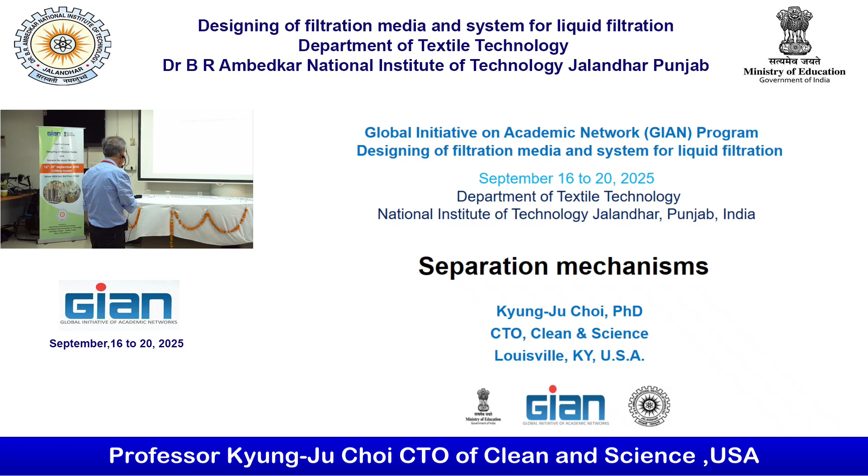Professor Mugwadi actually covered a lot of material too. That was really good. I really appreciate it, because I can shorten down my presentation a lot, because this is all separation and nothing to do with filtration.

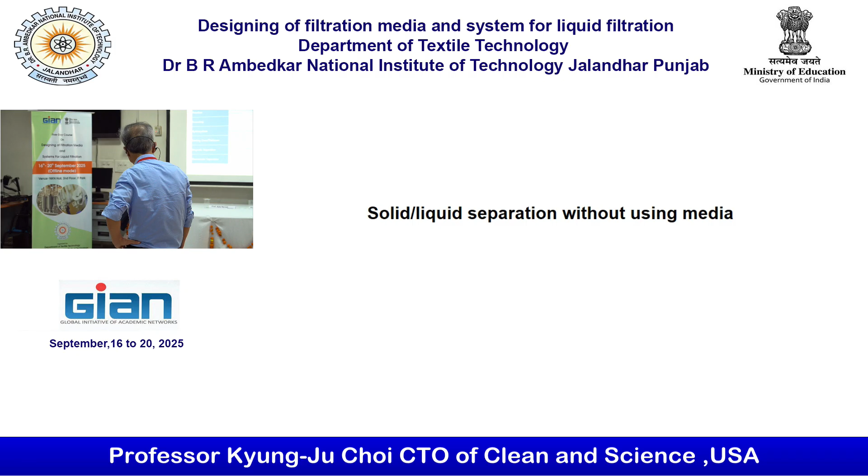This is the busy slide, one of them. Solid-liquid separation mechanisms: sedimentation, we already talked about it, and centrifugation, flotation. Oops. Decanting is quite an important one. The hydrocyclone, settling, thickener, magnetic separation, and electrostatic separation.

So sedimentation, everybody probably already knows: gravity-based settling, clarifier. So the advantage is cost, it's low cost. However, it's a little bit slow. And sludge dewatering. I believe you're going to have a copy of this one. So I'm not going to go into detail, but decanting and hydrocyclone. Magnetic separation, I have some examples of magnetic separation. You look at it. The electrostatic, that's currently quite a popular area.

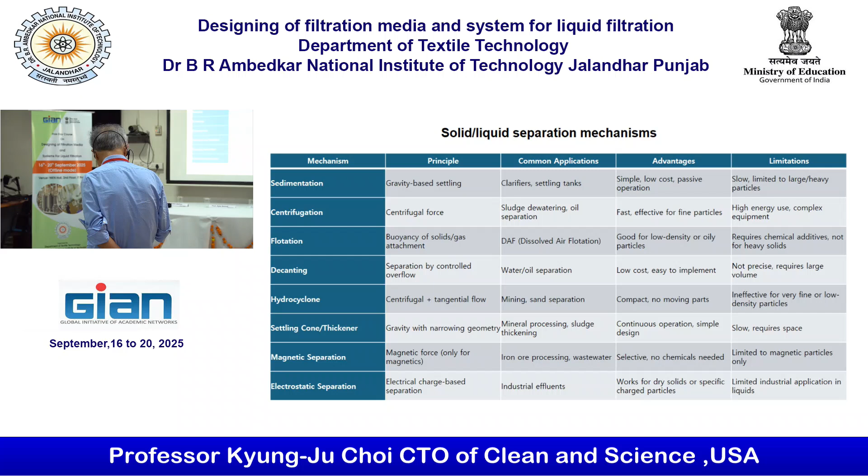Can you raise the volume? I think it's maximum. Did you know? Probably you don't know. I'm actually a singer. I like to sing. I'm actually a tenor. Huh? When are we going to listen to your song? Last day. At the party. But you have to do really good at the exam too. There is an exam on the last day.

So the exam is quite important, but as long as you listen to the lecture, then it's not that bad.

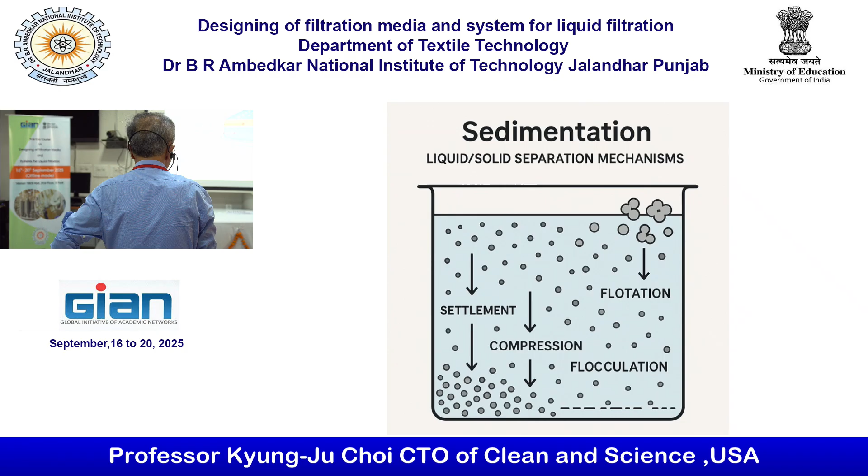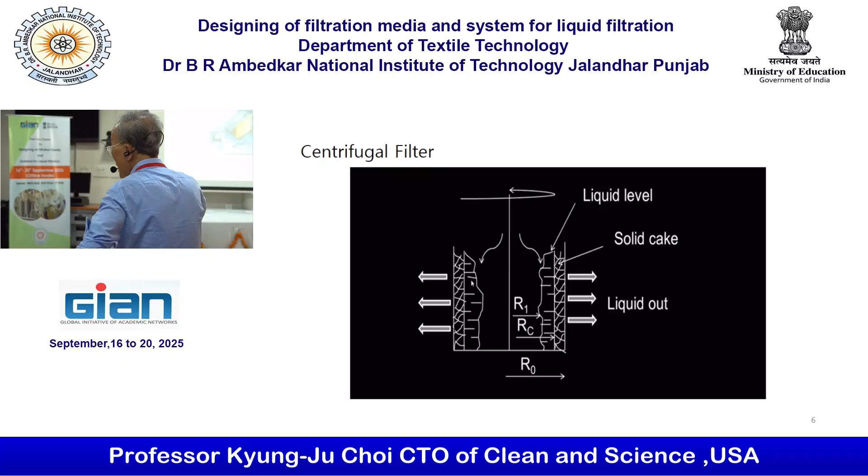Sedimentation, flotation. I have a course on flocculation and agglomeration level. Also this part, Professor Mugwadi covered some of them. Yeah, centrifugation. This is a really important subject. This one you will probably see when you visit the dairy company. They use it a lot. So I'll give you one example of it.

I love to drink milk, but not whole milk. My favorite is 1%, because 1% has a little bit of cholesterol, but not a lot. So that's why I like 1%. That's my favorite. Also, you can make yogurt out of 4%, but skim is not easy to make. So I'm a chemist. Also, I have some other minor major; it's more or less the biological area.

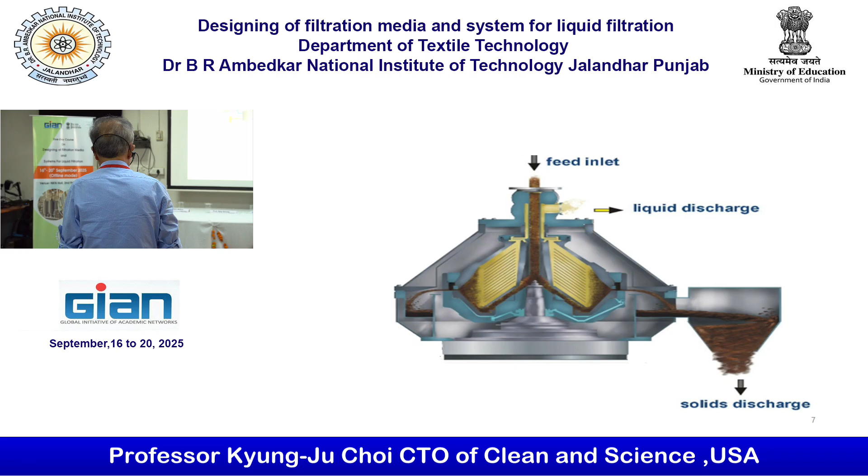So this one, there are several reservoirs, so you can take 1% or 4% during the centrifugation. You will see this equipment a lot when you visit the dairy company. This one, I don't know whether you already knew about this process. Anyone know about this? Flotation. This is a really important part of the separation process. Currently a lot of companies are using this technology.

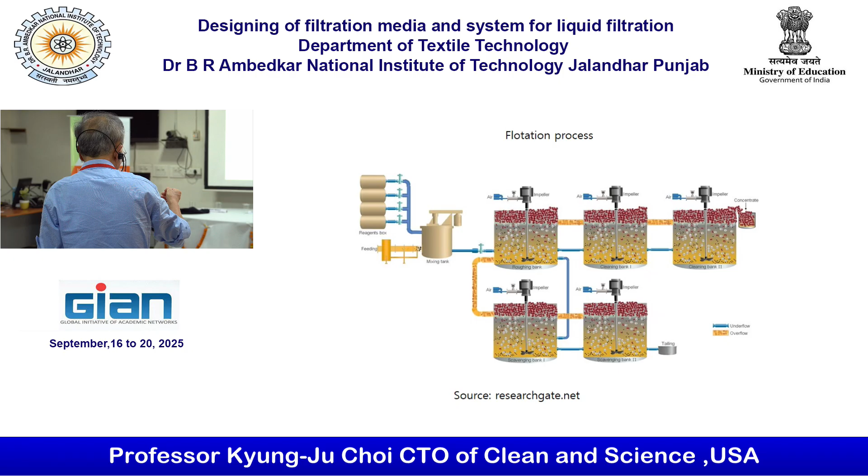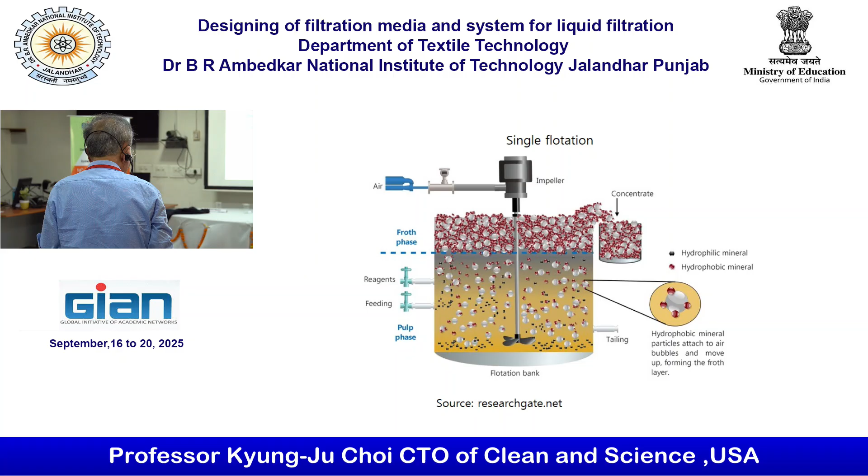Then this is the bubble. We create the bubble if you spin it. Then the bubble catches only the hydrophobic mineral and then floats. That's why you can separate it out. This is quite an interesting one. This technology is not that old. You know, froth flotation process. Froth is the mass of bubbles.

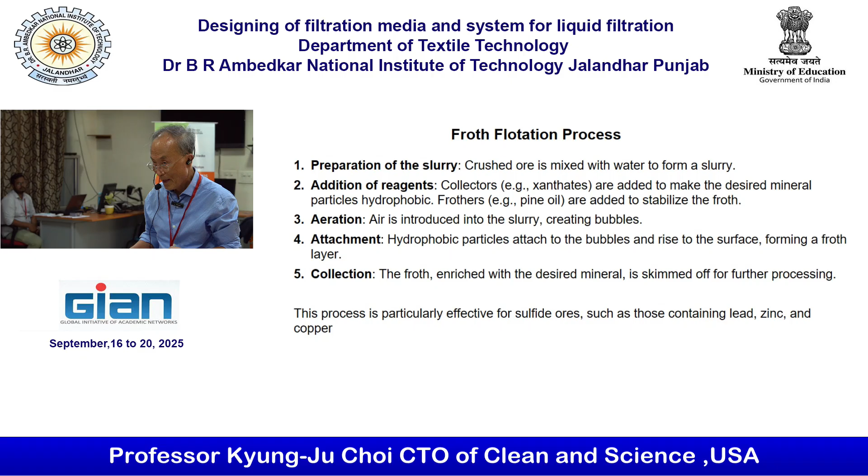Here you crush ores and mix them with water to form a slurry. Addition of reagent. I don't know whether you heard of xanthate. Have you heard of it? It's a sodium salt. So you have to add the xanthate and frother, which is pine oil. It depends what type of material you want to eliminate. So aeration is quite important.

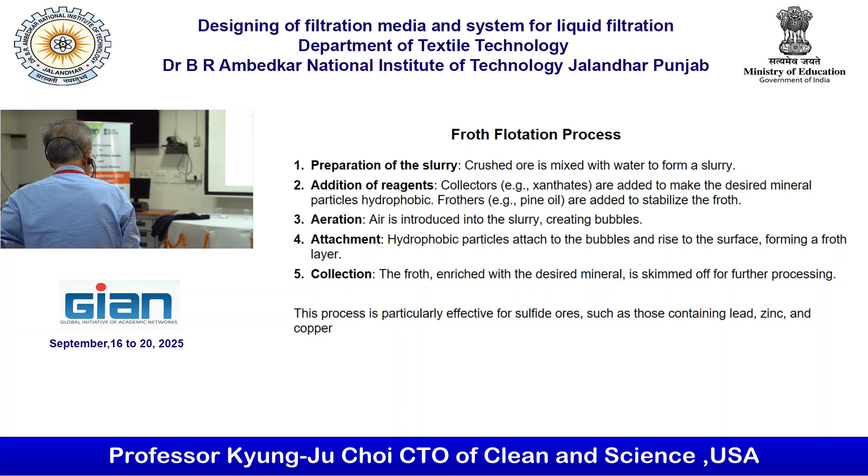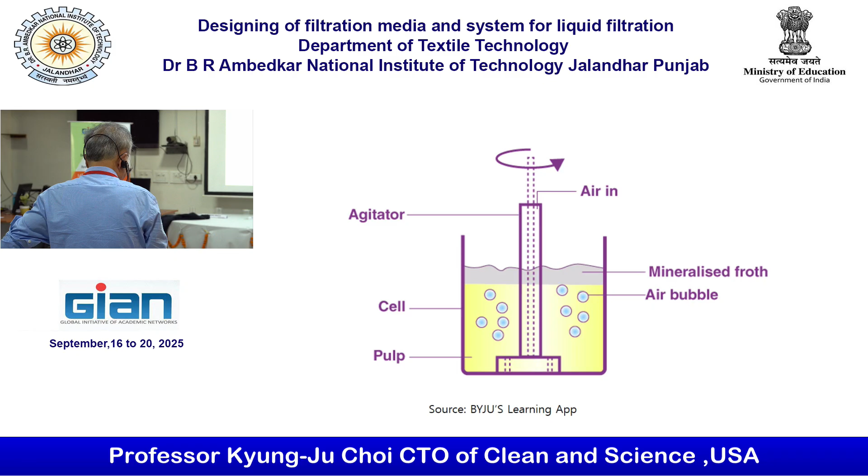So the froth flotation process came out not really a long time ago, maybe about 10 years or something, but it has been quite popular at this time. It's more like a schematic of the material that we cover, making froth. Sometimes you use compressed air to make a bubble.

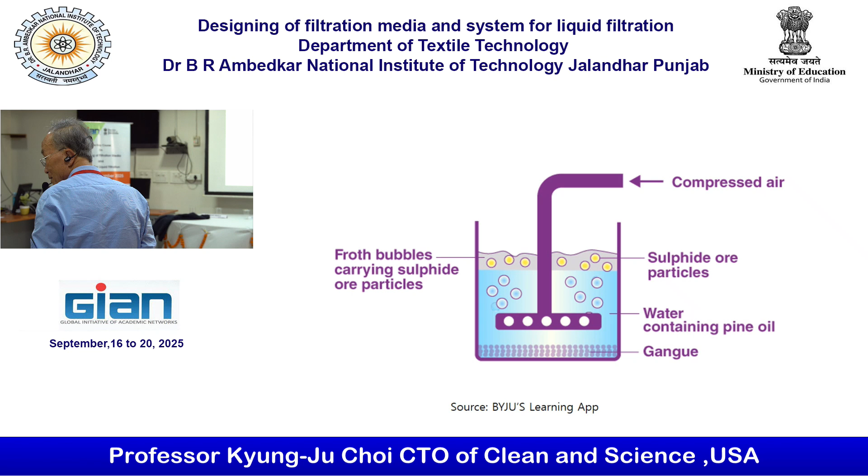Advantage: almost all types of mineral can be separated by this process. Surface property can be controlled with flotation reagents. See, I gave you one, the xanthate, and that is only one example. There are a bunch of others too. And the disadvantage is it's quite expensive, because the material we use has to be compatible with the material you're going to filter out.

The last one is quite an important one too. It's dependent on the operator. So the operator is quite important, especially in liquid filtration. If the operator knows the principle of it, then probably the efficiency is rather high, but if the principle is not that strong, then it's trouble. That's why you are here, to learn the principle.

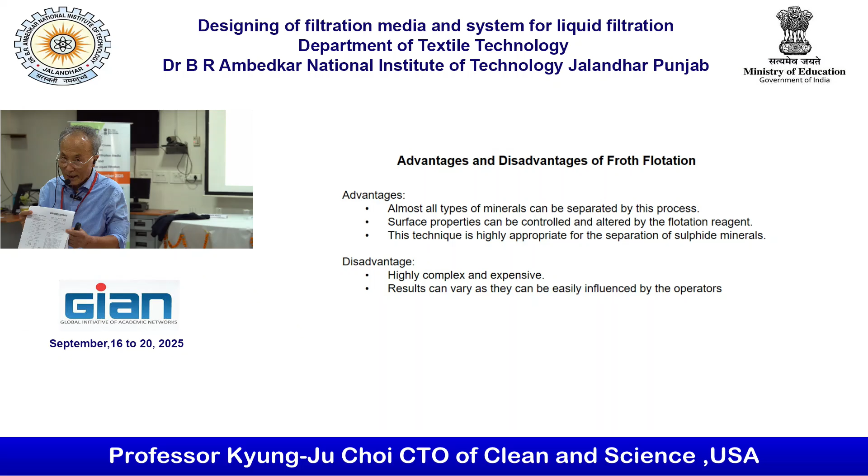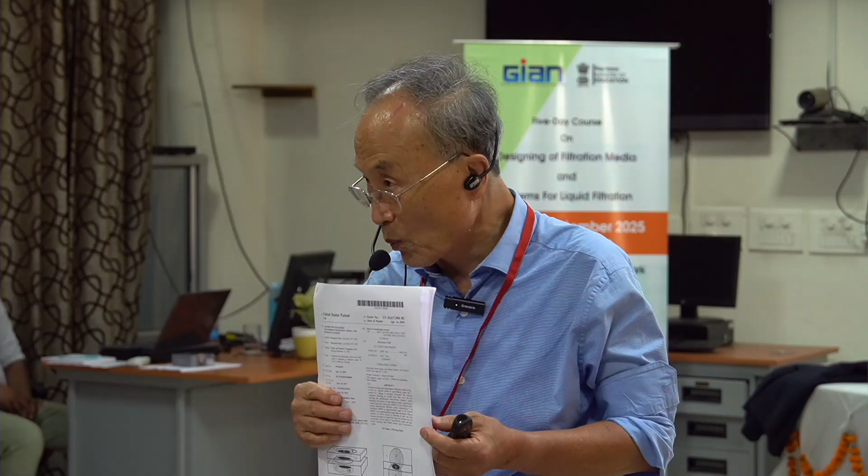And then you're going to have my patent, this one. I believe you have the soft copy. Yes. This is the media design, how you're going to design the multi-layer media. The principle is there. The example is there too. So this is quite an important paper. I'm not going to go over the detail now. I'm going to go over it a little bit later on.

You know, when I teach, what I like to teach is the course you never heard of. See, the course was established a long time ago, but there was no instructor to teach that course. For instance, flow through porous media. The course is in chemical engineering. Any school, they have flow through porous media there. But when I look at the history, no one wants to teach that. And so I just volunteered to teach it.

So you have to know the mass transfer phenomena. Otherwise, you may not be able to understand the principle of it. The other thing, basics are so important. However, if you know only a little bit, then you cannot apply it. If you like to apply basic principles, I'm going to give you some examples later on. The basic fluid mechanics, the issue, if you like to apply those principles, then you have to understand the basics.

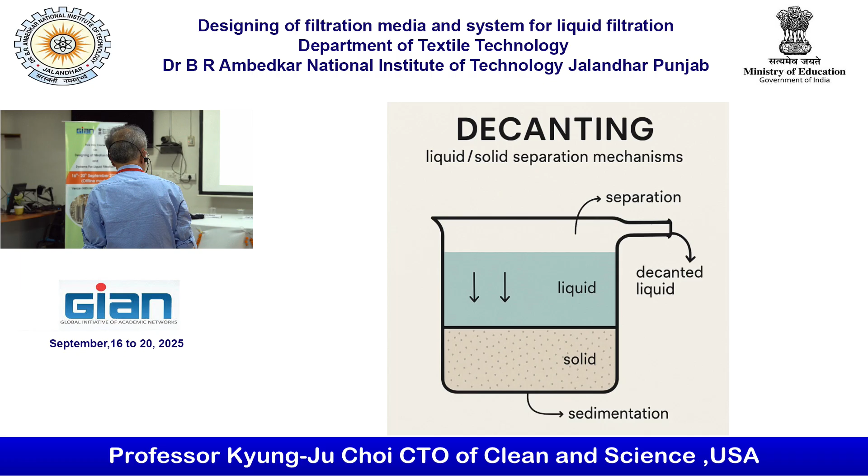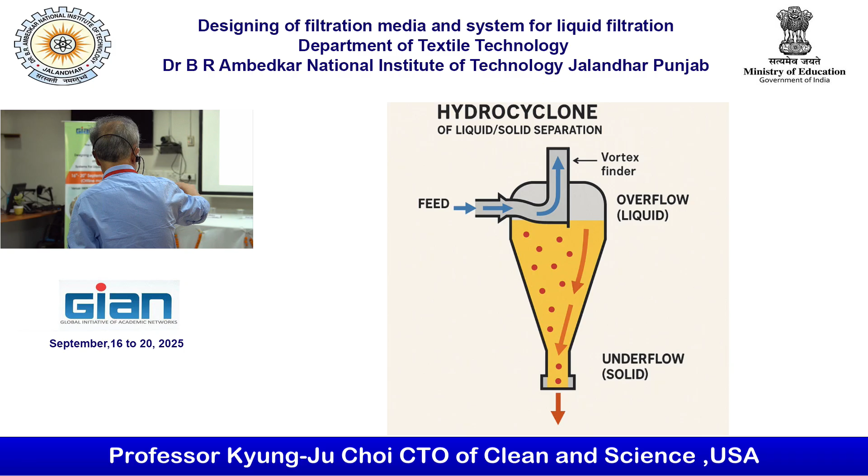Decanting, I believe you already know about this one. Hydrocyclone. This one looks two-dimensional, but actually it is rotating. Here, this is the schematic. Solid comes out, and liquid goes over with the vortex. This is one type of sedimentation. We actually use this one in waste treatment and water treatment. So they have some combination of hydrocyclone along with sedimentation.

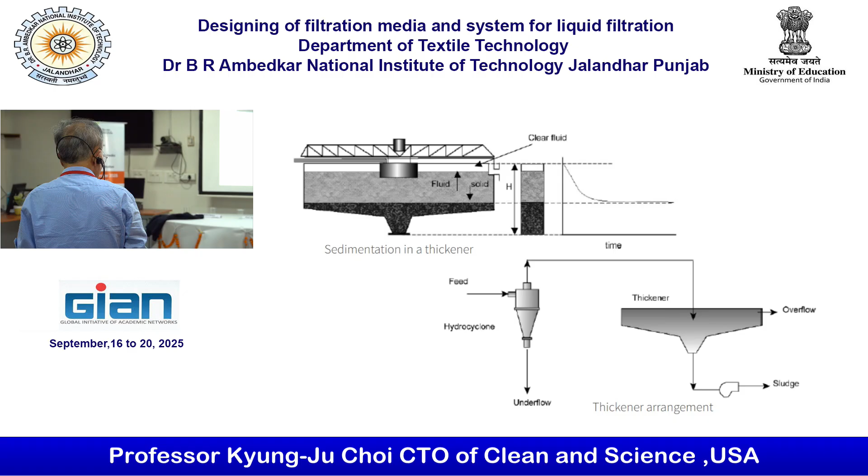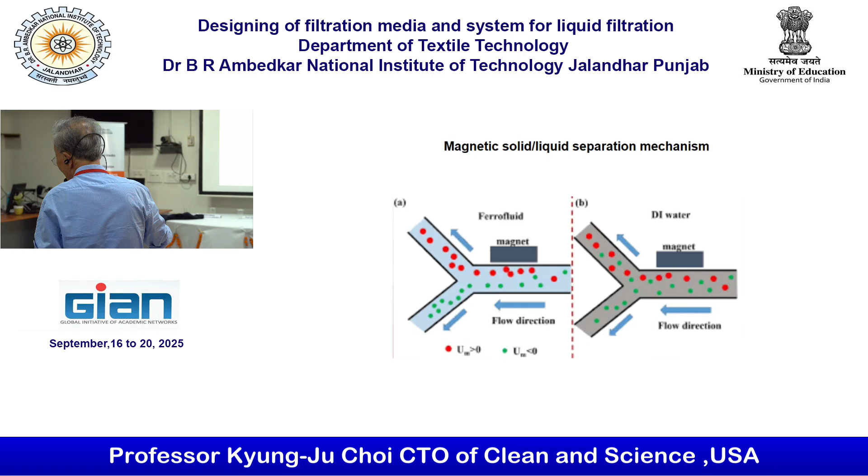Magnetic separation. Well, actually he covered some of them. Magnetic separation. The mining industry uses it a lot. High gradient magnetic separation. For example, kaolin clay purification to remove iron oxide, magnetic separation is good. Wet drum magnetic separation. He showed you the dust removal kind of video, but this one is a little bit different. They use magnetic separation, but the principles stay the same.

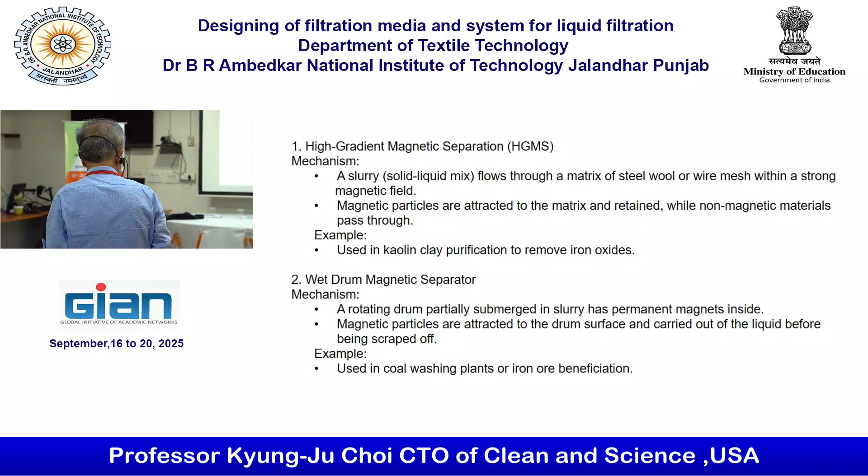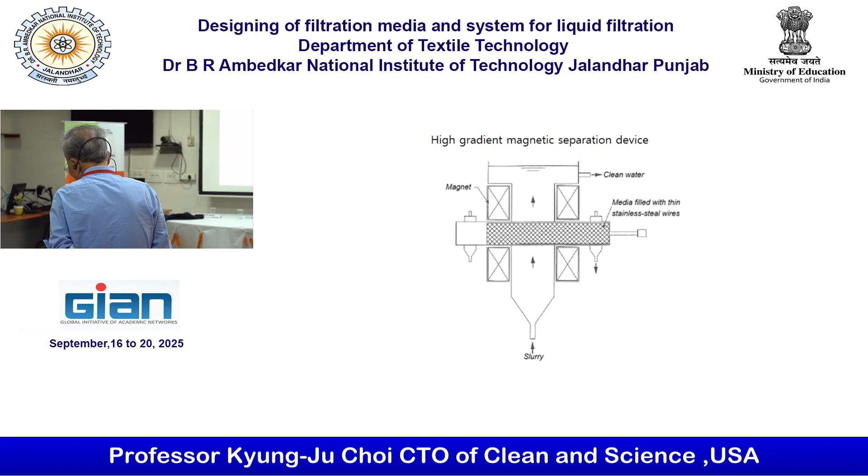Oh my dear. No, that's it. Okay, good. Thank you.

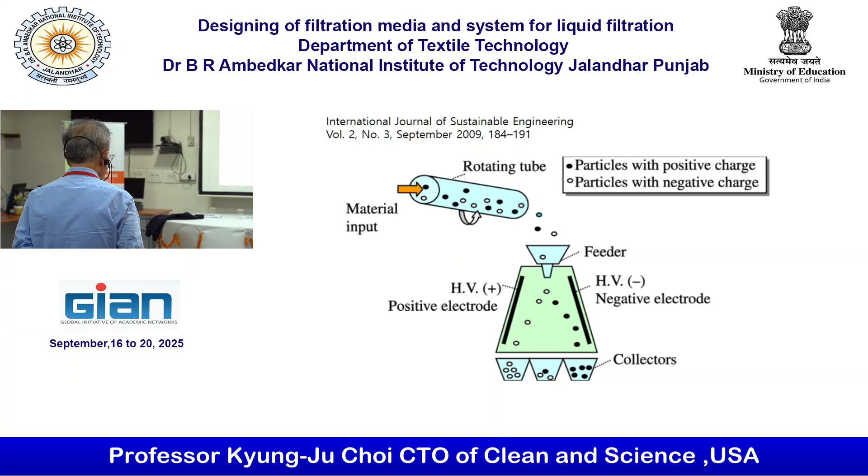Yeah, positive electrode, negative electrode. So somehow you can separate out using that. This is not magnetic. Rotating tube. It's electrode separation, not magnetic, I think. Yeah, that's electrostatic separation. So this one uses a static electrode. Normally, if you apply electricity, they use high voltage. So you can separate any type of solid material like that. It's more like classification. I'm not sure whether this one is commercially available or not. It's 2009.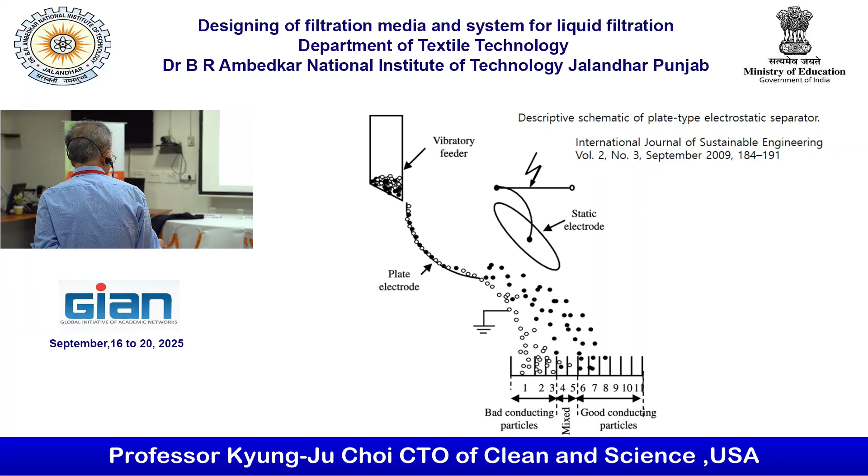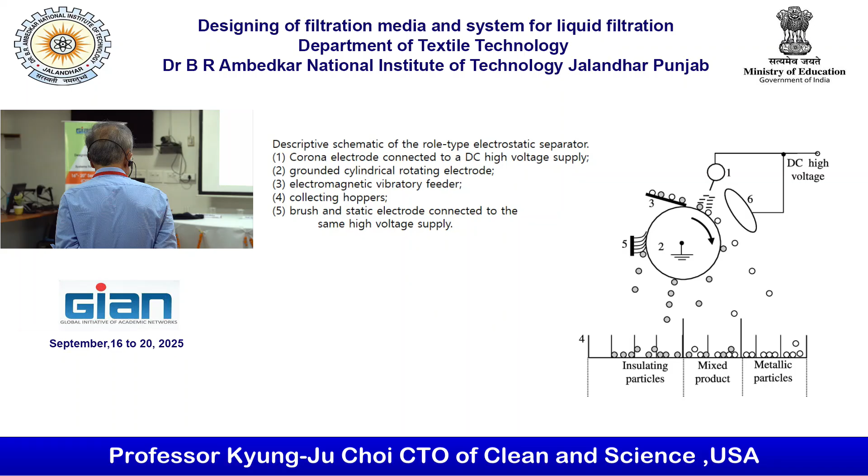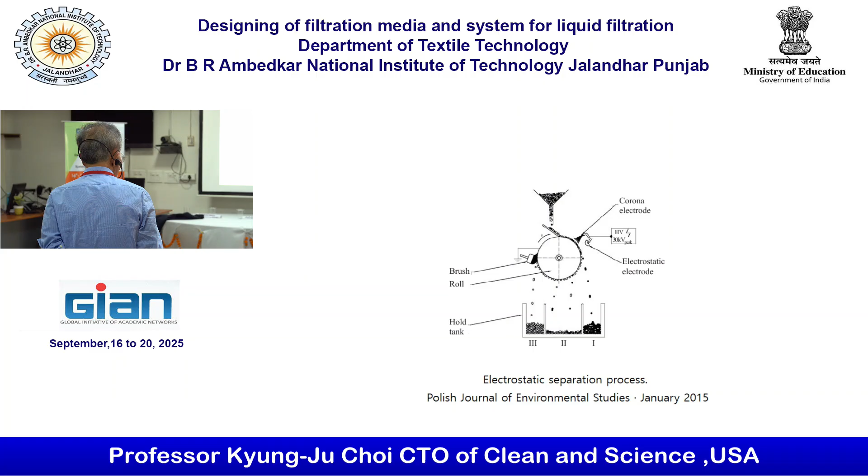So this is corona charging. It separates by the charging level on the surface of particles. Then you can separate that way. That's another one, electrostatic separation. See, I put the source down here, so if you really like to look at it in detail, you can. Electro-osmosis dewatering. See, if it is dewatering, it's really high purity, so the media you have to use is really fine. It's more like a membrane. We're going to cover membranes later in detail, because membranes are booming. They're getting more popular than before.

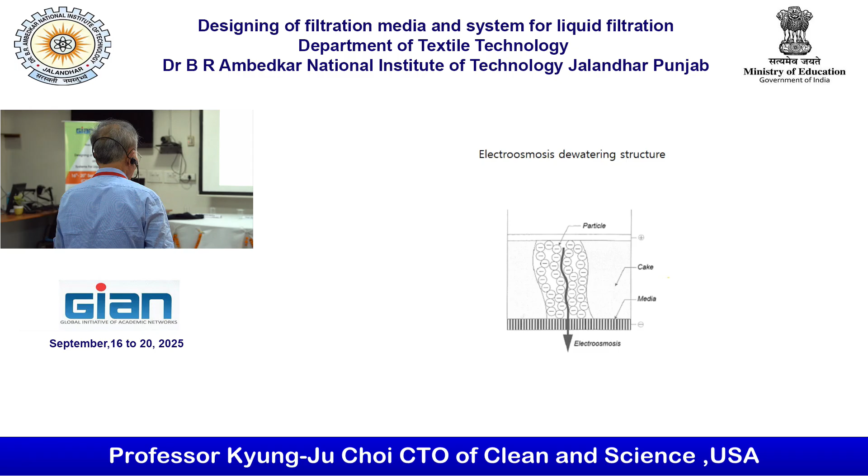So here, I use media, but actually this is not media. It has to be membrane. Membrane. This one is in your book. Okay, now the liquid separation mechanisms. Decantation, centrifugation, extraction, membrane separation, distillation, which he covered already, coalescing, settling, electrostatic separation.

So when I was working for the Cummins Engine Company, I did only coalescence, because with engine oil, sometimes you have a lot of coolant water mixed with it. So you have to separate it out. The other important area is fuel. Fuel sometimes has a lot of water in it, so you have to separate it out. That's why coalescing is quite an important factor.

So if you work for industry, the value of a company has two sections: intangible assets and tangible assets. What is the intangible asset? That's patents. Yeah, they call it proprietary information. So since I have more than 50 patents, that's company property.

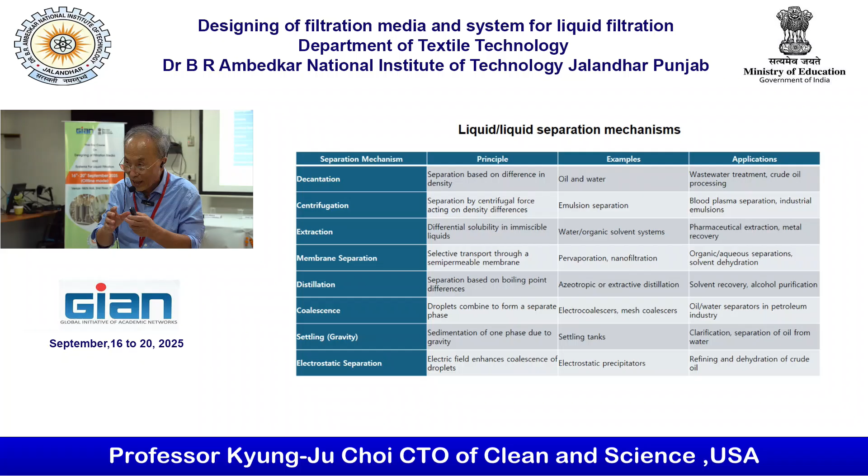So decantation, we already discussed. Centrifugation, I'm going to discuss a little bit later, maybe an hour or so later. Extraction and membrane separation, I'm going to cover in an hour. Membrane separation, and then distillation. Distillation was really popular about 50 or 60 years back, when the petroleum industry was booming. Petroleum has to go through distillation. Diesel uses only a slight distillation process, not a lot. But the gasoline you buy for your car is a distillation process. So 50 or 60 years ago distillation was quite popular, but not now.

And coalescence. This one is still popular, but I want to look at the contact angle carefully. Without knowing contact angle, you cannot do any research on coalescing. Coalescing is quite an important area. It doesn't have to be automotive application. Food processing is the same thing. Settling and electrostatic separation, we just covered a slide earlier.

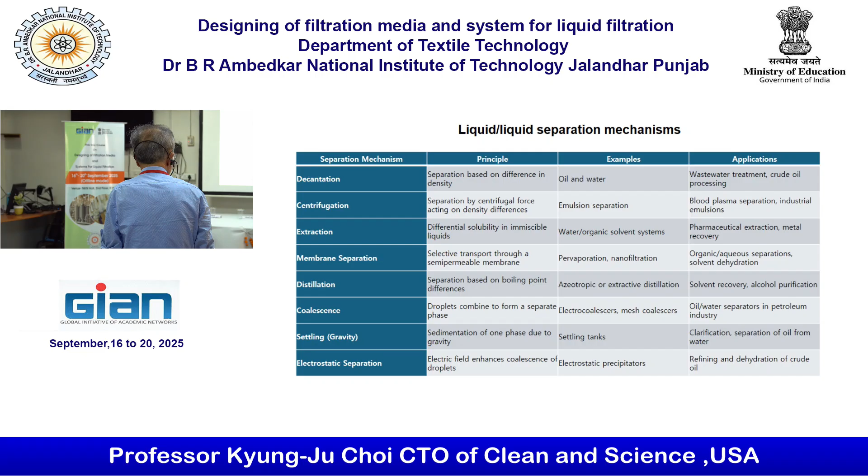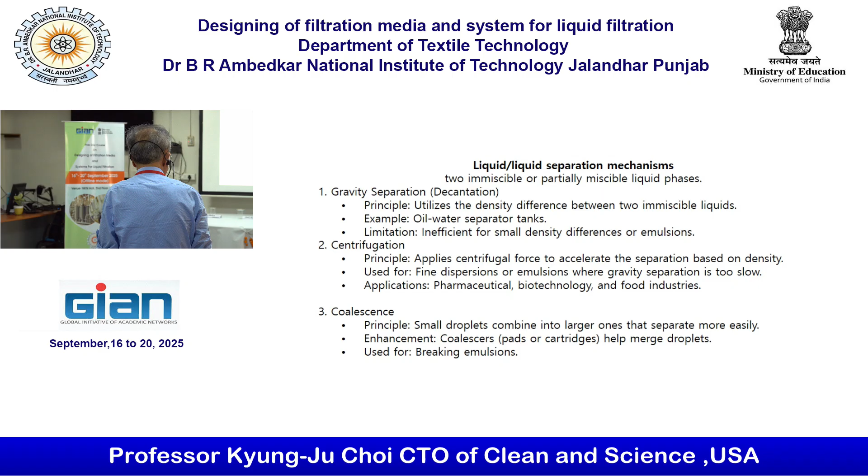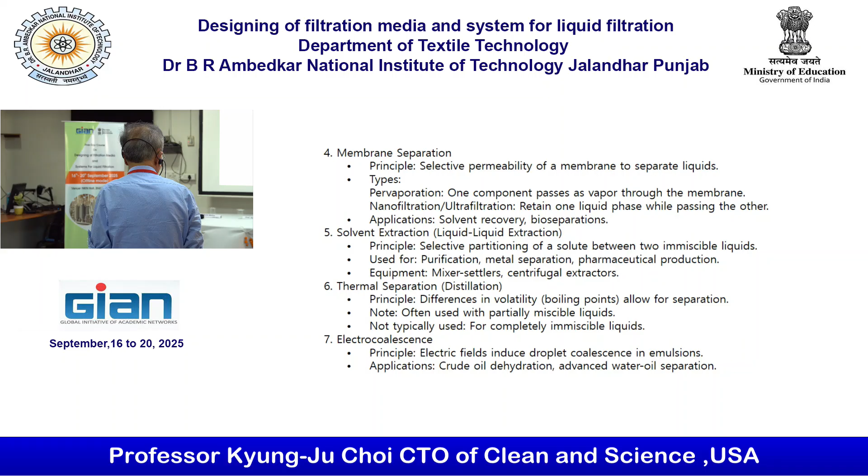This one is kind of the summary: centrifugation, coalescence, membrane separation, solvent extraction, thermal separation, which is distillation. Electrocoalescence is quite an interesting one, but the principle stays the same, a combination of electric field and coalescing. A type of decantation is density separation. It's a cyclone. Liquid cyclones they use some, but not a lot. But for air, they use a lot.

Here is the example of coalescing. He already covered some surface filtration, and this one is depth filtration. The coalescing occurs on the other side of the filter media. This one is more likely surface filtration. So oil is floating from the water.

The design of the filter media looks simple, but it's not that simple. I told you earlier, it's not going to be a single layer, but several layers. Then you have to do the contact angle test carefully. Then you can design multi-layer. The principle for designing multi-layer is right here. Use this and the contact angle, and you can design coalescing media. It may be a PhD dissertation or not, but it's quite an interesting area. I got the schematics from the Journal of Industrial Textiles.

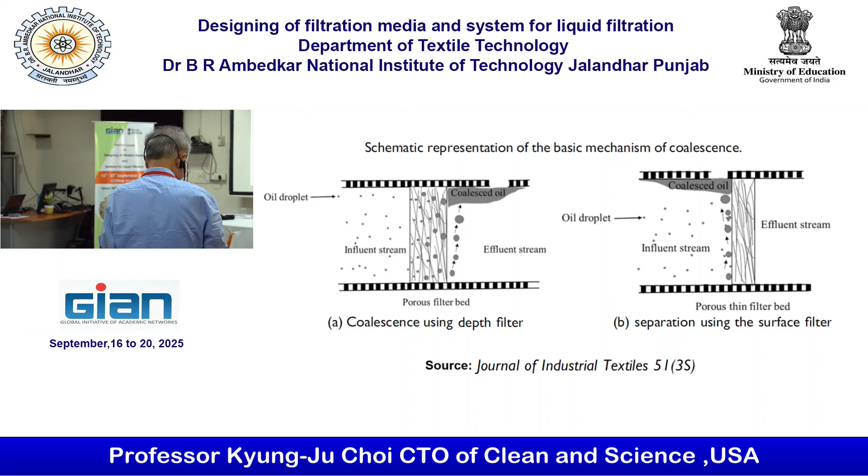Okay, this one, surface modification and membrane. This came out 3 years ago. It's more like separating the incoming pollutant, which passes through the membrane, so you may be able to get the pure solvent permeate. This is a highly sophisticated membrane material. I'm going to cover 1 hour of membrane structure, so this is a little early to talk about.

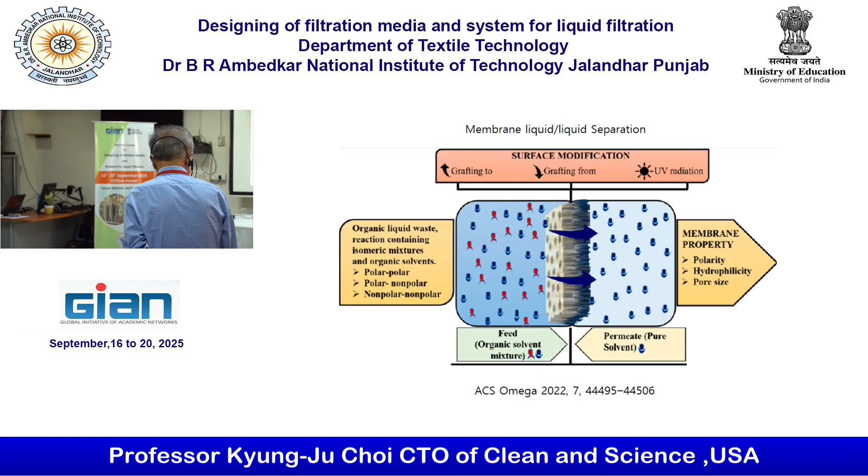Liquid extraction. The fuel oil, the solvent. If you add some solvent into the fuel, then you may be able to separate aromatic material from the treated fuel. I'm not really sure we're going to use this technology a lot. When I worked at Cummins Engine, we never used this one. But this is in the reference.

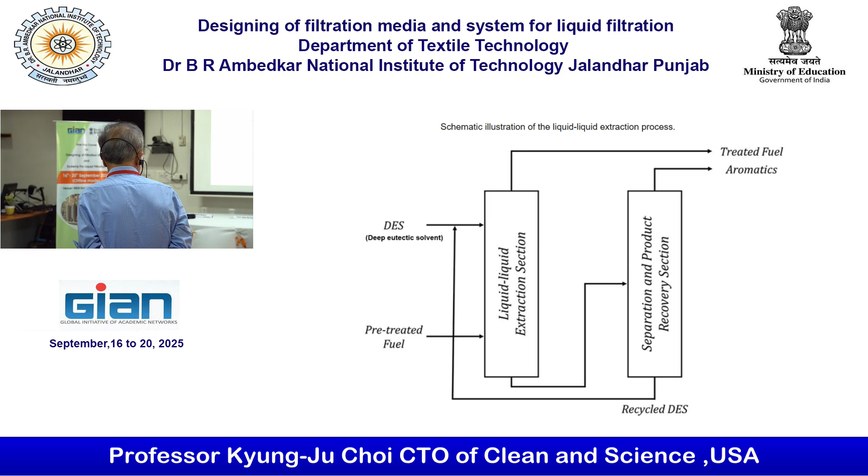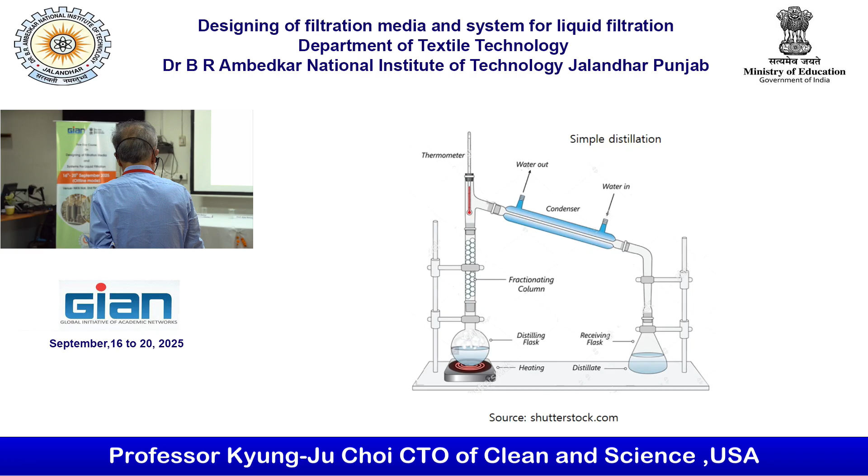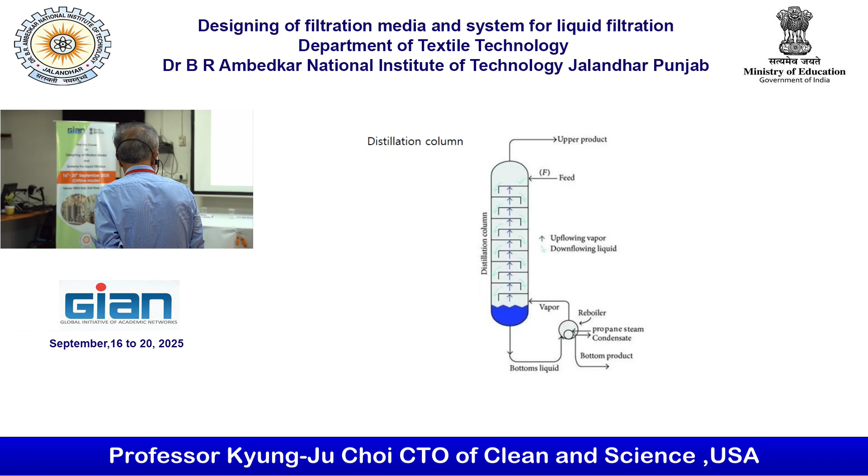This one already covered distillation. This is what you normally look at, making gasoline out of raw petroleum oil. That one is a bit different process, only distillation. But the principles stay the same as the previous one.

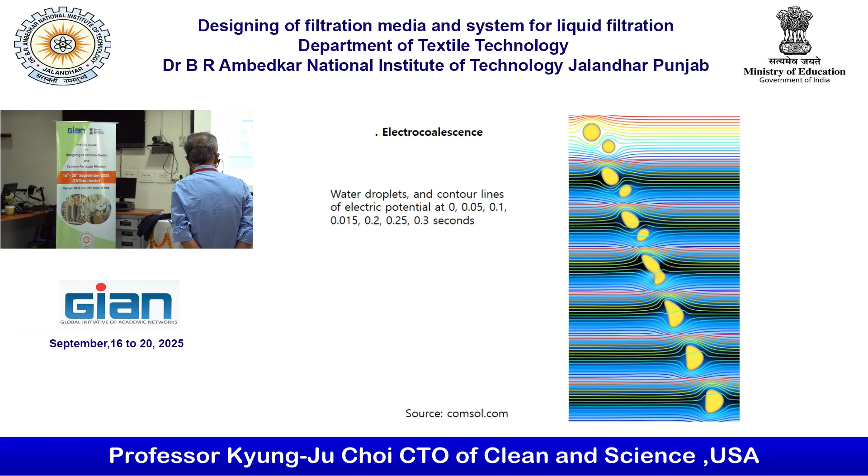Electrocoalescence, this is quite an important one. It's recent technology. For two liquid particles, if you apply an electric field, they can coalesce, agglomerate, making a big droplet, so that you can eliminate it. Electrostatic coalescing. This is really recent technology that I got 2 years back. So the water phase drops, and then you can separate the water phase using electrodes.

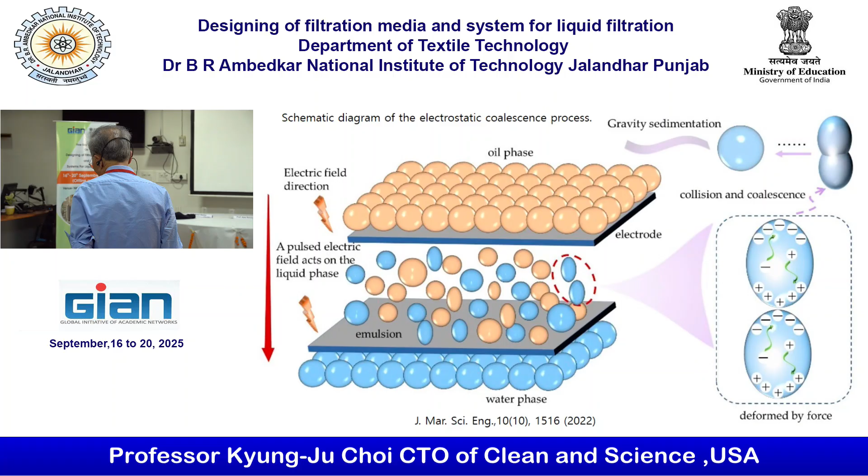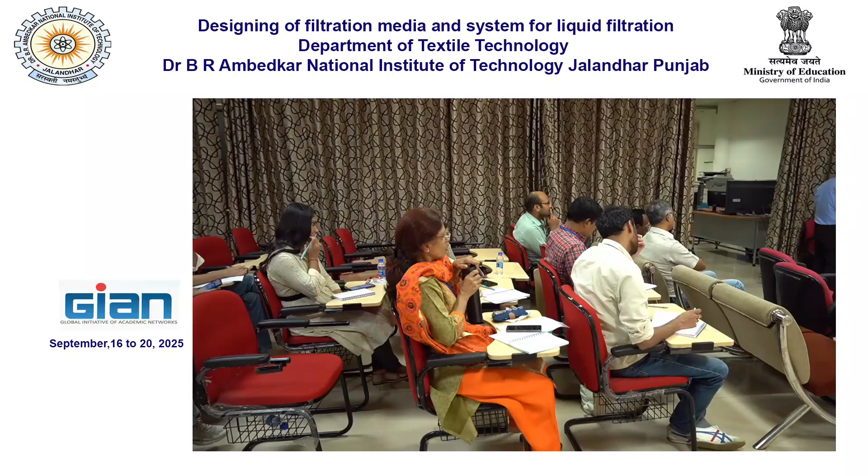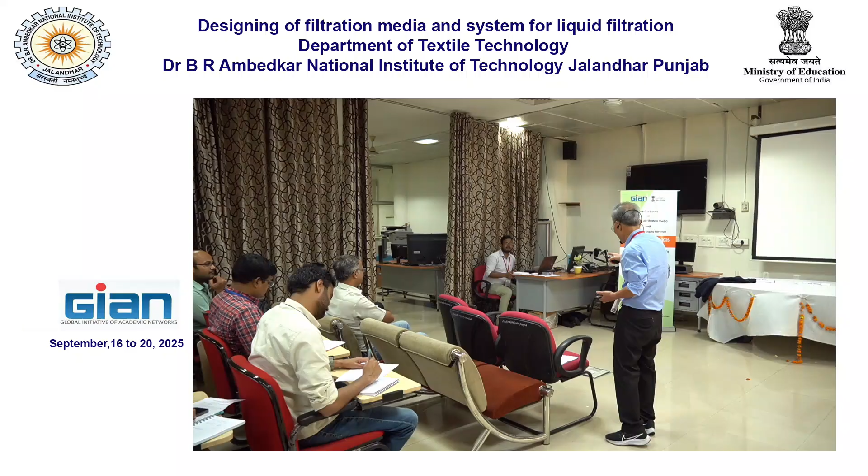I think that's the end of my presentation for separation. So I don't know. 3 p.m., sir. Huh? Okay, what time? The timing right now is 3 p.m. One hour is left. If you want to continue, then continue. Oh, okay, great. Then I'm going to go through the so-called last session, which is the tutorial. For the tutorial I have a bunch of material, a lot of equations, but I'm not sure it's good material for the afternoon. Probably the morning might be better, but it's okay. Tutorial.